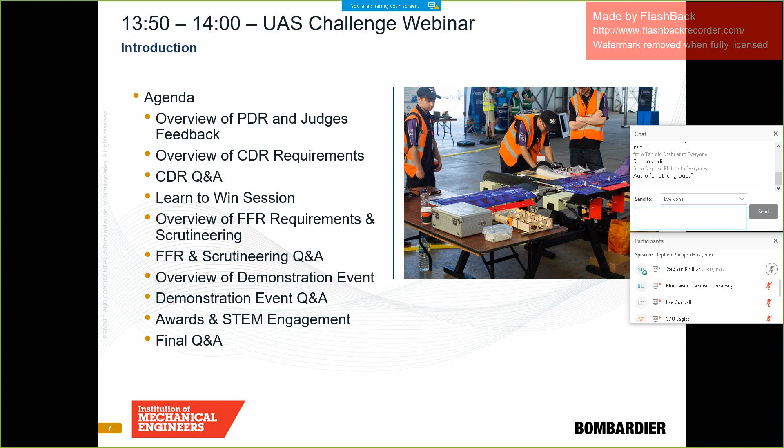Then I think we'll have a quick coffee break and come back to talk about the FRR requirements and the scrutineer requirements for a head scrutineer. Then we'll talk about the overview of the demonstration event, and again have a bit of time for questions and answers. Then we'll end up on the awards and STEM engagement activities of the competition.

Next slide, please. Okay, so for this judging aspect of the competition, I'm going to hand you over to our head judge, Lambert.

Good day, really, because I guess people are in all sorts of time zones listening to this. So, where we've got to in the competition now is you've done the concept paper and we've given you feedback on that, and that was great. You all delivered your concept papers on time, I think. Excellent.

PDR, delivered them. We've been through the judging process. We had our meeting yesterday, the judges and those. I'll only be able to give you some generic feedback today, but I hope to get your individual feedback and comments on your PDR papers within the next week or so. That's the aim. Then going forward, you've got the CDR coming up in the middle of March, and then the FRR of the demonstration event.

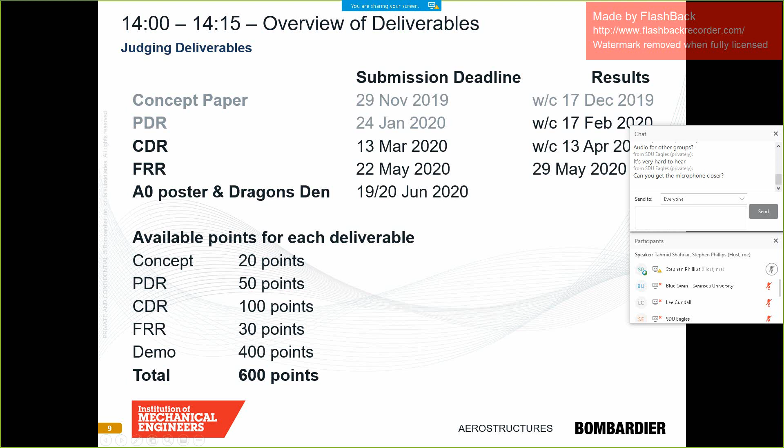Just to remind you a bit about where all this sits in the overall competition: the concept papers were 20 points. We gave you some points this year just to encourage you to actually go and complete a paper. PDRs were 50 points, and then going on, you can see how you come up with that.

Right, so what I'll do is talk a bit about the range of scores that you see, talk a bit about documentation, and then go through the sort of things we were expecting to see in the sections.

Some of you did extremely well, a lot of you did. We're very encouraged by what we've seen with the PDR. Year on year, people are getting better and better at doing this. And then a few pointers about adherence to the rules, just to make sure there's no misunderstanding about the issues on the rules.

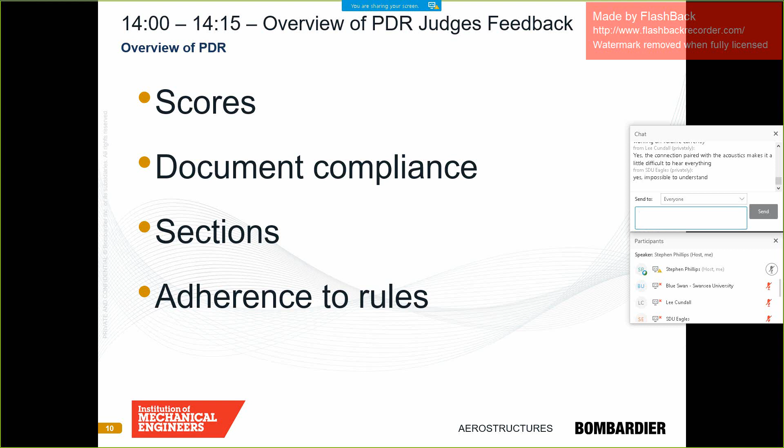Right, so the range of scores we've got this year - remember, this is out of 50 points, and these are preliminary scores. The scores for these documents will remain preliminary until the demonstration event, until we've seen what you've actually delivered, and confirm these scores. But they range from 19 to 46 of the teams, with a median score of 32 this time.

However, it's a bit of a 'but' - 3 teams were slightly late in delivering their PDRs, and as you will have seen clearly in the rules this year, we've introduced penalties for late delivery. Now there are 2 reasons. One is, in the real world, if you're bidding into a contract or a research grant or anything like that, if you're one minute late on the time, chop, you just won't get read at all. And punctuality is absolutely essential in industry for these things.

So we're being very generous in just giving you some points penalties for being late. But the other reason is the team of judges I've got doing this are all senior, busy working engineers in the industry. We don't have long to do it. They're devoting a whole load of their own time to doing this judging, and so it's unfair on them if we can't get the documents to them to see as well. So apologies in one respect, but the three teams will end up losing some points simply because they're late. So do try to please be on time.

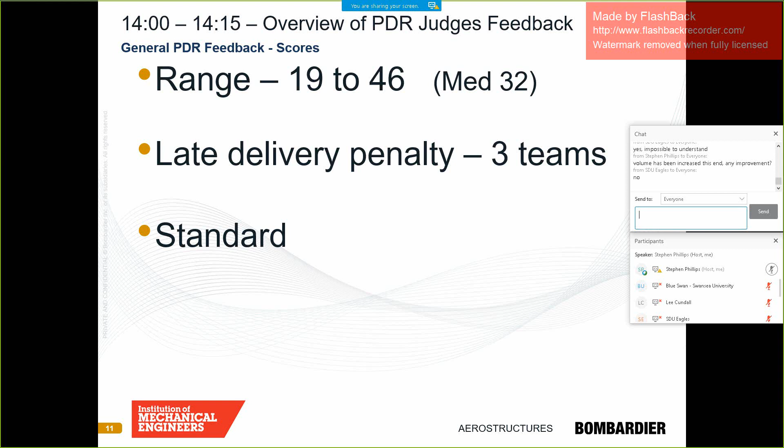But overall, I mean, the standard of the documents was very encouraging this year. Next slide please.

We've lost a bit of this slide, but one thing that's actually a little bit irritating is document compliance. Two-thirds of you, literally 24 of the 36 teams, failed in one respect or another to follow the very standard rules about how we want the document presented.

And it might seem annoying doing this sort of thing, but it's all there for a purpose. On the cover page in particular, we do ask that the compiler and the academic supervisor, or their equivalent, sign off the document. This is a process you'll have to go through in industry, and any document you produce has to be signed off in that way. A lot of you failed to get either or both of those signatures.

We don't want pages we didn't ask for. I know it may be nice putting in context pages, lists of abbreviations and all the rest of it, but unfortunately we've not asked for them, so please don't add pages we don't want. Don't add appendices that we haven't asked for, because they won't get read, they're just an irritation. Do abide by the page count, because it's there for a purpose.

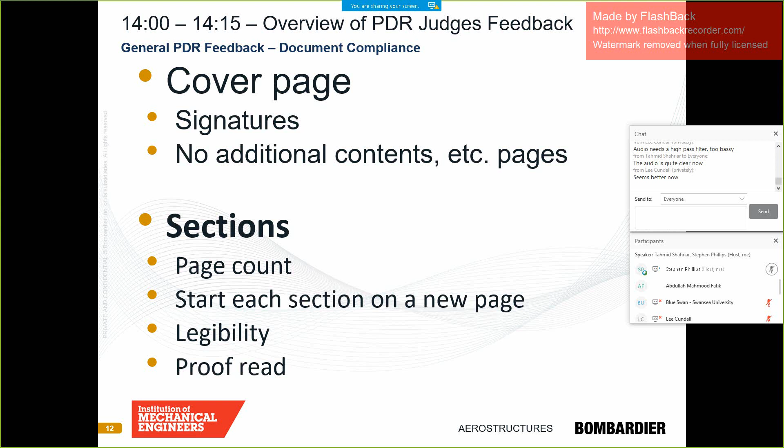What we were hoping to see here on project management is a plan going from the start to the end of the project, not just a little section of it. This is a project plan: where your progress is, how far you've got, maybe your percentage completion of activities, which bits you're ahead on, which bits you're behind on. This is to help you think about how you're doing and where you need to put resource or effort into sorting things out.

Do, as was said this morning, testing. You heard a lot this morning about the process industry does in designing really complex and important things like wings, and how much effort goes into testing. Testing tells you a hell of a lot, so don't leave it to the last minute, because you will learn things.

It is very hard, particularly if you're in teams that don't work closely together, for the integration of this—what somebody's done here and the impact over here isn't obvious until you start testing something. So do give time for testing.

Concentrate on your major risks, and that's why we ask you to do risk assessments. It does help you understand where you need to put resource and effort into. And we ask you to give some mitigations to those risks and do something about them. Don't just write them down as a paper exercise.

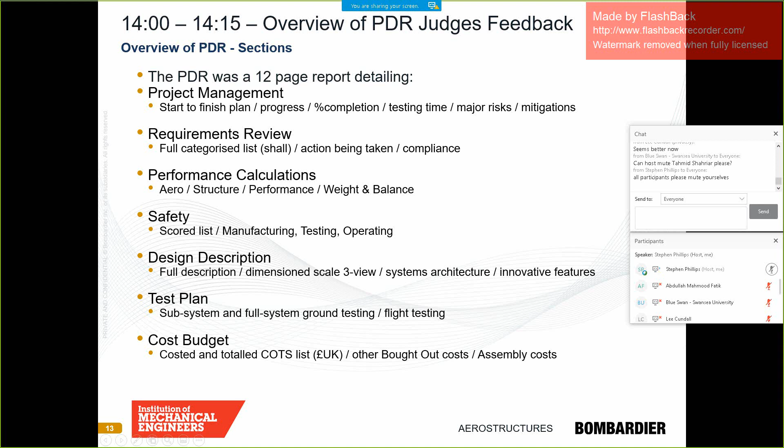And I think it's a lesson learned for our future next year's rules, that we've got to be clearer to you what it is that we're looking for. But bear in mind for the CDR. So just a few quick points on issues that I think came up in the rules.

Most of you seem to have understood the rules properly, but just for the benefit of the doubt: the minimum aid package you must fly is a first aid kit, which weighs approximately 500 grams, and at least one flour bag, the smallest being a 500 gram flour bag. So that's the minimum aid.

It is not just a first aid kit, it has to include a flour bag as well. There is no maximum, other than the fact that you can't have a maximum takeoff mass of more than 6.9 kilograms. So if you can build your thing for a kilogram, you can carry 5 kilograms of aid package if you can. Some of you seem to have read that 3 kilograms is just an illustration in the rules of combination, and the flour bags can be in any combination you like, in 500 gram and 1 kilogram ones.

By the CDR, we would be quite interested in knowing what it is you're planning to carry. Nothing else - Christina's got to go out and buy the flour bags, and we don't want to be either short or have too many to dispose of later. There's only so many cakes you can bake afterwards.

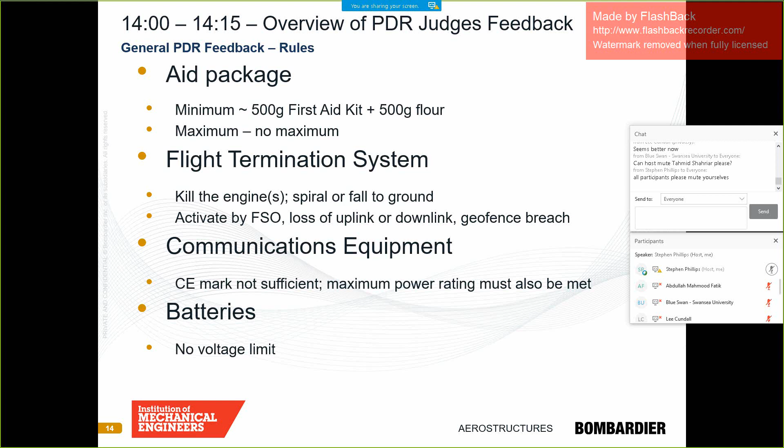What you can do is carry more than one power logger, to split the load, if your continuous current rating or peak current rating is going to be above the limit of the power logger. Or you can opt not to do an efficiency measurement if you prefer - you don't have to do it, but if you don't carry the power logger, we will deduct its mass, albeit only 20 grams or so, from your allowable maximum takeoff mass. We'll ask questions later if that's clear.

Michael, over... yeah. Right, oh no, I'm doing it on my computer again.

Right, so now on to the CDR. We can do some questions at the end, come back on anything from the PDR, but that's history now - you can't change what you've written.

The CDR, as you'll have heard this morning, is the process that industry follows in designing and developing an aircraft. You get to a point of doing critical design review that says now the design is frozen, ready, I can go and build it.

We fully appreciate that the timing when we're asking you to deliver these reports is probably way out of kilter with what you're actually doing. Most of you, by March, when we're looking at these, are well past that stage. What we're looking for is a report of what you did at your CDRs. The timing, as I said, is not great.

What we're looking for on the CDR is a series of sections, so please bear with us. The cover page doesn't count in the page count, and please do it the way it is, because when we've got 36 of these things to look at, having that information on the cover helps us remember what so-and-so said. Particularly the picture of the aircraft is extremely useful to remind you which one you're looking at.

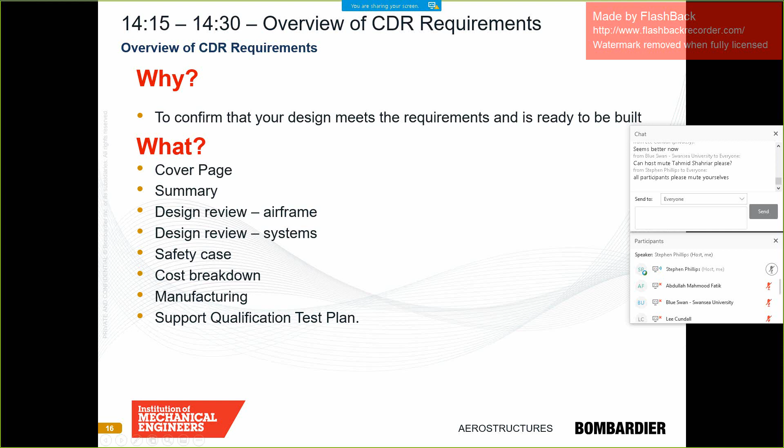Then we go on to the meaty pages on the various things. On the summary page, what's important is changes from your PDR - significant design changes from your PDR. You'll continue this, and it becomes really important too when you submit your FRR that it's any changes from your CDR, because we do need to be able to see that.

So the ones that are collecting points, the design review, is quite a long section - 4 pages, plus a page which is a detailed dimension drawing, please. We split it into airframe and systems - this is no industry standard split, it's just so that they get about the right sort of size. In the airframe bit you've got aerodynamic structures and the propulsion system, just to balance it out.

The assumptions you made in arriving at that, and any calculations to support it - we want to make sure you've again thought back about the requirements, confirming that you're addressing all the requirements of the competition. If for any reason you're deviating from that, and there may possibly be some reasons, you must explain in detail why you think you're justified in doing it. We will tell you afterwards if we don't think you're justified in doing it, but you do that.

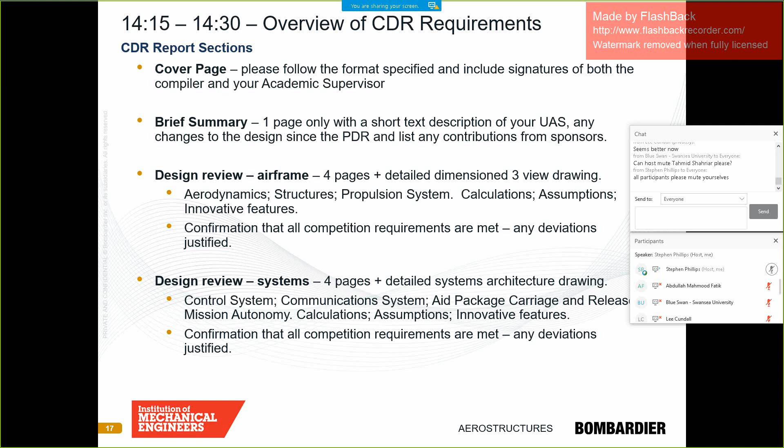The systems are the other bits - basically the control system, the communication system, and the aid package carriage and release, and how you're going to implement your autonomous features. Again, the same stuff, but please, again, a page of a systems architecture drawing as detailed as possible.

So then we go on to the safety case. As we've banged on over the years, safety and aerospace are very twinned items. We're looking for 2 pages on your approach to safety - this is just taking it on further in more detail from the PDR.

And we want to see this table of hazards really scored. So we give you an example - this little colored diagram, which is used not only in the aerospace industries but in many industries, so that helps you to concentrate on the things that are really important.

You want to get to a post-mitigation state where you have reasonable control of this, or if there is something that's still a significant risk, again explain why it is and how it is you're going to try and limit its impact. But remember, it's not just about the flight operation side - that's clearly important, but it's all aspects of risk.

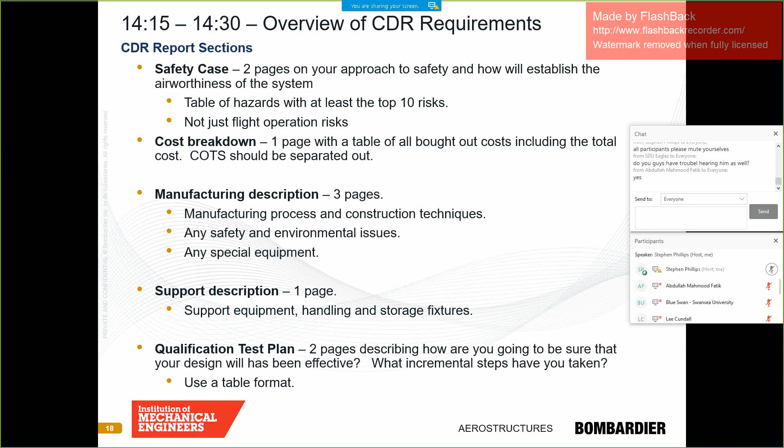So if we go on to the next thing, a summary of issues around the CDR. Remember, this is worth quite a lot of points - 100 of the 600 total points. So it's worth putting some effort into this because it could well influence the overall champion competition.

Do take note of the feedback that we give you from the PDR. To some extent it might be as well to acknowledge if we have made some points, even if you don't, for whatever reason, implement them. Maybe acknowledge and explain why - maybe you even disagree with us, or couldn't do what we suggest. It's probably worth doing that. But hopefully, if we do make a suggestion you think is a good one, you actually take it on board.

But you absolutely must address any corrective actions given. Corrective actions are things that will end up with either an unsafe or a non-compliant vehicle at the end, which would ultimately prevent you from flying on the day. You must, if you've got any of those, refer to them in your CDR and specifically how you have affected the correction - we will be checking.

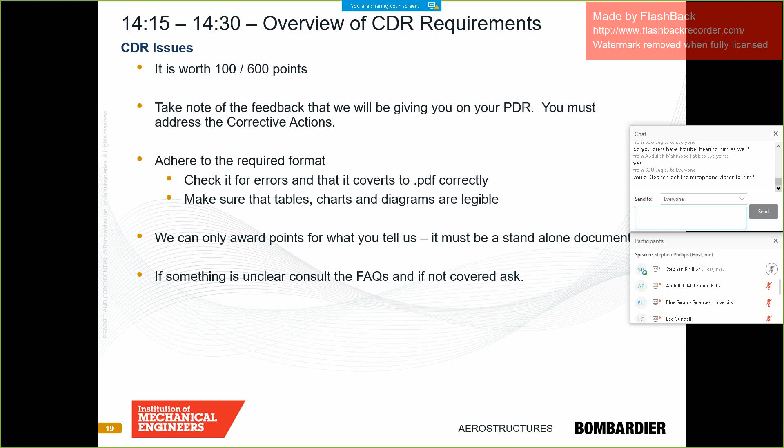But yes, do ask. Don't just make an assumption that might turn out to be incorrect in the end. And then finally, I just got... oh yes, different to my picture, a few sort of think-abouts.

Now this is just a totally random list, but it's a really good opportunity to look back at these requirements and make sure we go through rigorously. That's why we asked you originally in the concept stage, and certainly in the PDR, to have a structured list of requirements, so that you can keep going back and checking: yes, I've done that, no, I haven't forgotten that, yes, the flight termination system will do what it's asked to do.

As I said, make sure about this communication regulation side - just double check that you're going to be compliant with that. Double check about the flight termination system. This will be tested on the ground before you allow it to fly, so if it doesn't do what we asked it to do, you're going nowhere, because that's not safe.

Think about aid package carriage and release. That's part of the core program, therefore it is important that it does release, that it does work, because in past competitions we've had a lot of quite decent flying, but a lot of teams have had problems with their aid package release.

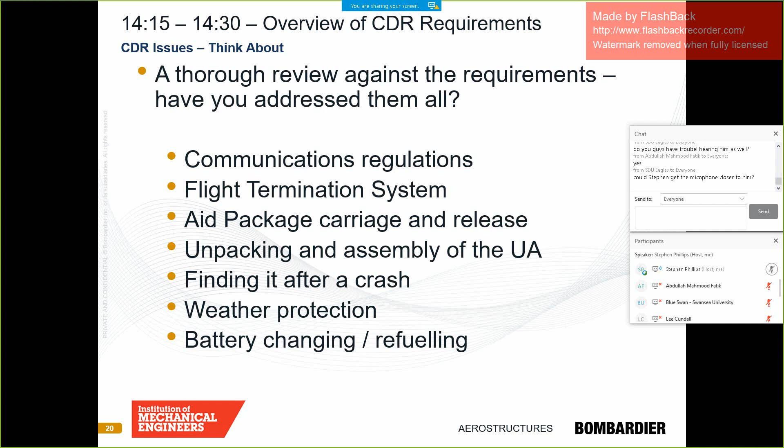And the other thing is being able to quickly change your batteries or anything else in the aircraft. Just think about its supportability in that respect, or if you're going to refuel it, because some of you are doing a circuit, collecting some more aid package, going around again, or between the two, the core mission and the optional mission. So just think about how easy and straightforward it is to do that.

Oh yes, what struck me at the presentation this morning, talking about co-located teams and things like that, is - particularly for the Open University - they're not very co-located at all. But even for the rest of you, no doubt wandering around, I suspect you don't do all of this all sat in the same room at the same time.

Do think about the way your configuration control of your vehicle works, because somebody having a bright idea and saying 'oh, I'll do that' might not realise the implications and the consequence on other team members. So this communication between team members is really, really important.

And again, one of the reasons why you test these things - with the best will in the world, you will have done something, someone else will have done something else, and you haven't realised the interaction between them. So when you come to test it, you find the wing falls off or something, because someone has changed that bolt or whatever for what seemed like a good reason. So you remember that. Right.

So on to Q&A. Well, yeah, very good question that really. And I guess looking forward to the following year, we're thinking about the process and trying to make it slightly more sensible in the timing of the academic year.

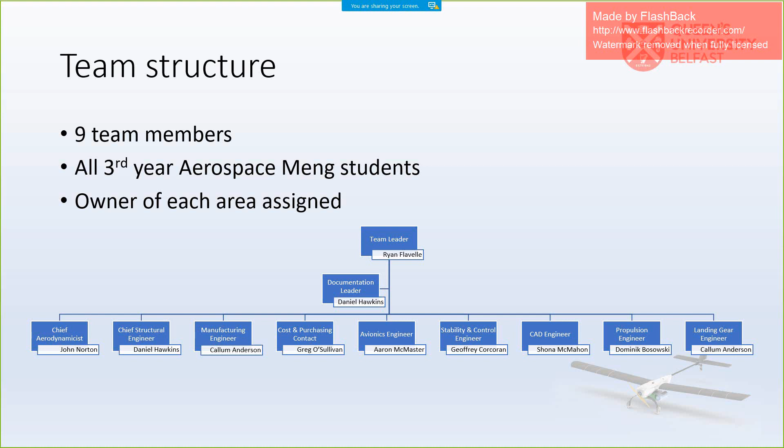So the way we worked our team was leader Ryan, and everyone else took on a responsibility. For example, I had avionics, other people had structures, manufacturing, stability, things like that. But that didn't mean I went away for 6 months and then we just shoved it all together. It meant that I was in charge, so if I made a decision, that's what we went with. But every week we had a team meeting to make sure everyone was actually doing what they said they were doing, and that it was looking right. So we made sure to work as a team and everyone helped each other out so that someone off for a week, we didn't lose time.

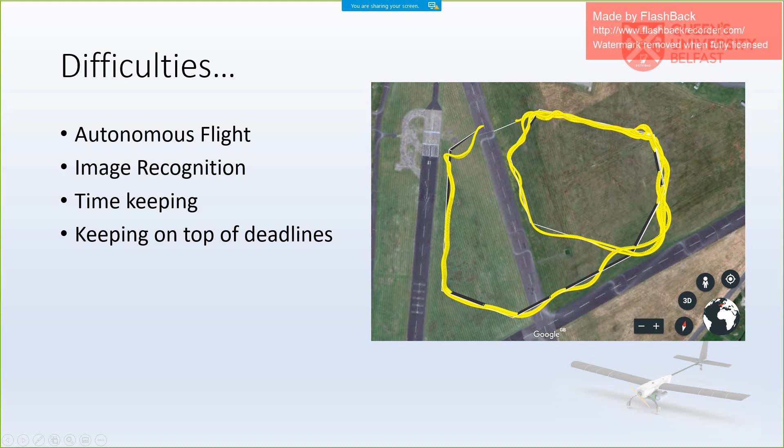Just some top tips, the way sort of stuff, and I think we do it quite well. Keep the design simple - there's so much stuff that you need to drop payload, right? You need to make sure you have an aircraft that works in isolation by itself, because you can't get an aircraft working with those extra capabilities. Be proactive and work - don't leave your CDR the week before. Make sure you start early, start chipping away at work. Like Aaron said, fly early, fly often.

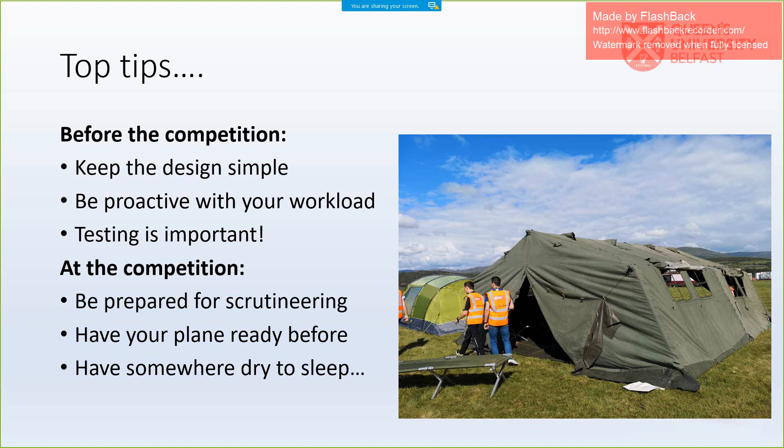Just to summarize the overall experience, it's the soft skills and the hard skills. Obviously you build on your engineering skills, you build on your teamwork, you build on your ability to make decisions as a team, take responsibility for making decisions - that sort of stuff we didn't really get before this module or this experience. Also, it's great fun to get out there, great fun building this thing and seeing that reward from it. So I think what we found is we want to make an experience - so buy in.

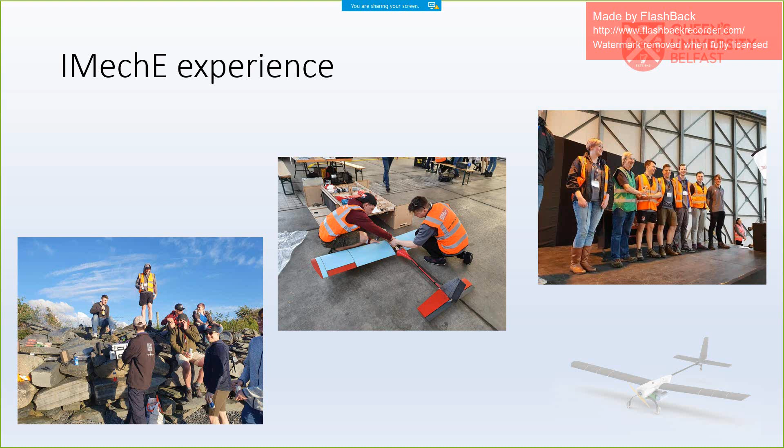No, go on - as chief scrutineer, how did you find scrutineering? What did you find was the challenge?

Interesting - it's something I've pushed for a few years, but that was the tipping point to say, why don't we get it done? If you go back 3, 4, 5 years, people were taking these out, diagonally fitted into vans. So that was a key bit - people were arriving, but actually this thing's got to operate, and you need to have it protected and looked after, so you can do that.

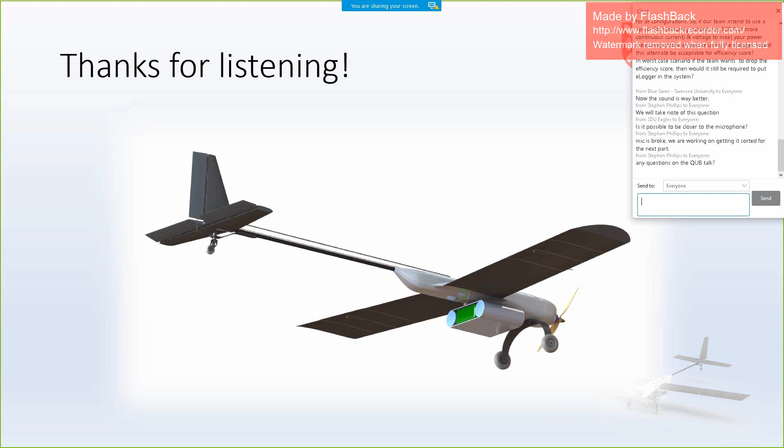Just to give everybody online an overview, the next part of the presentation is about the flight readiness review and scrutineering. This presentation will be taken by Rod Williams, who's the chief scrutineer for the challenge. Welcome, good to see so many of you here. Rod Williams, President of Bristol - I'm going to have to project my voice, so I'll let you know I'm ex-army.

Yes, welcome - this is about the FRR and scrutineering. This is about where you're turning your theoretical design into a practical, safe, airworthy flying system - that's what we want to see. Obviously it's the key couple of phases post-CDR, pre-actually operationally flying this on the event itself. Two key stages: flight readiness review, which is a continuation stage, if you like, from your PDR CDR process, bringing all that information to the point at which you're ready to do the flight, and before the second element of it, the pre-flight scrutineering.

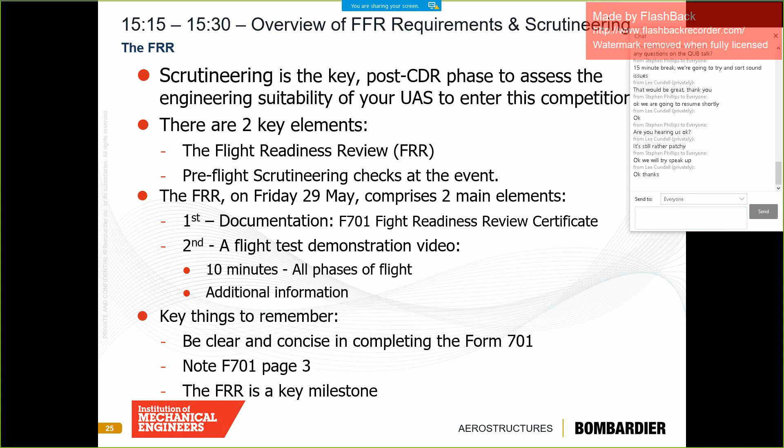As I mentioned, page 3 has some top tips. So what happens when you get to Llanbedr? You've arrived, checked in, got into your pit lane, sorted out, shaken out, ready, and the call comes for you to come through.

What we do now is quite well in advance. We used to do it just pre-flight and try to get you through it, but to keep the flow going, we now try to do that on the arrival day and as early as we can pre-flight. It should be probably about a 20-minute process.

Some teams have been phenomenally slick. The functional start, stop checks with flight termination system demonstration record is 38 seconds. Now that isn't setting up the aircraft and going through the checks. Other people, it takes a lot of tackling, messing around, tweaking, going back and coming back.

We need it to be as quick as we can. We need you to be as professional as you can in those jobs. Having checklists is ideal, and needing you to be organised. That's again why we want this to arrive in a transportation case, so it's protected and delivered.

We were in the environment of the humanitarian mission that you're going on. We may have had to fly that out freight, transport it by road, some distance, whatever. You need it protected, so we have them reach these things out of the van and get them through the doors into the room that we've done scrutineering in. They've clipped wings and all sorts of things.

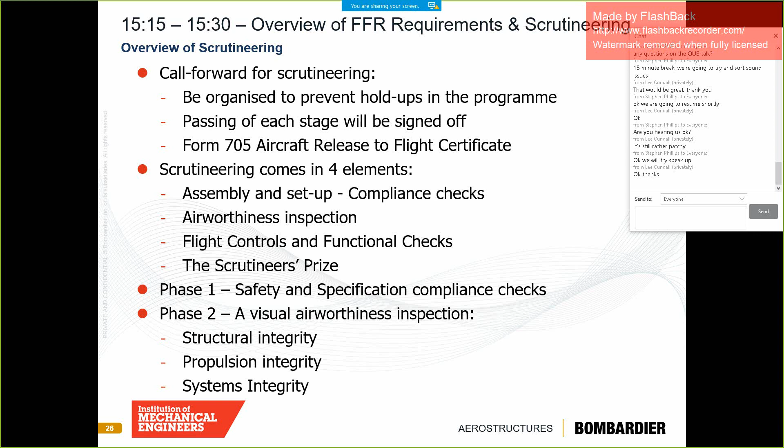So we click on one. The first thing about that is structural integrity. It was mentioned earlier that you have two points of security, so if one fails, you've got a secondary system in there. It's not necessarily got two bolts to hold it on, but that each bolt has two means of security.

Some examples up there - you've got a lock nut. There's a rundown torque strength in the nylon in that. They are reusable, but only so often. That's only one means of safety - okay, as is a lock washer holding a nut. One means of safety.

Lock wire comes in as a secondary means of safety. You have locked the bolt, and then you wire lock it. So as you can see with the lock washer, tightening it down, you've only got one form.

You can add over it Araldite - you can lock off with Araldite. There's a thing called torque seal. It's very good - you put a torque stripe on it and you can see when that cracks.

We'll count that as a secondary, but critically, the best way with nuts and bolts is to have two nuts. You lock one nut onto the other. And critically within that, it can be in safety.

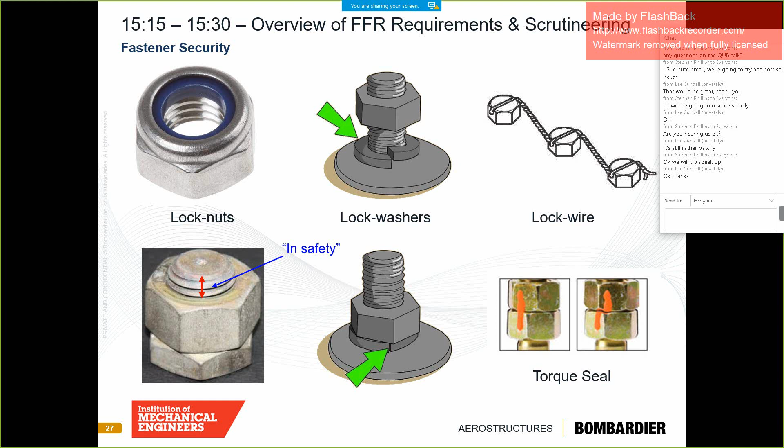In there, we've talked mechanical, structural integrity piece - that your undercarriage is strong enough to absorb a heavy landing. Maybe not fully - you may be Citroen 2CV crash worthy, that bits will fall off when you land - but fundamentally we want this to be able to take what you would expect normal landings to be.

That control runs are straight, secure when they're fitted. We don't want buckling push rods to go through. They should be nice linear runs.

For systems integrity, there's all sorts of odds and ends, but those who've got any knowledge of the Navy look at a bunch of wires that's thrown in and call it a snake's wedding - which you'll hear from a particular scrutineer that works for us, Freddie, who's in the Navy. That's your wires all over the place. Your wires should be tidily routed and secured, so they're not going to interfere with the controller - not going to drop through and trap something else, interfere with your delivery system. They're quite key.

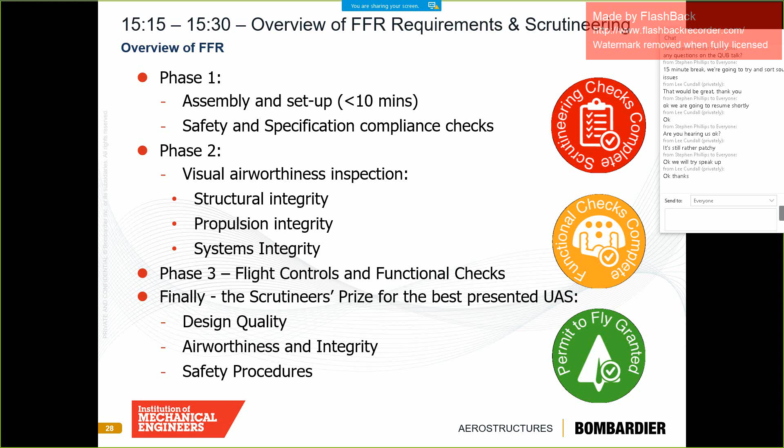They're looking for things that stand out. Say, Freddie the Navy guy - he's actually pretty hot on the wiring stuff.

Make sure your FRR video is good, especially if you've got someone who can get them on doing it. Putting together a good video that shows us not just all those stages of flight, but actually how you developed it, how you got there, the flight test regime you've done, even your static test regime.

We were talking to someone earlier - you saw the flex of that wing. There's a good bit of video from last year or the year before of people hanging weights off the wings of the aircraft. They haven't turned the aircraft upside down to show the actual flex that would happen, but they've done something to demonstrate it.

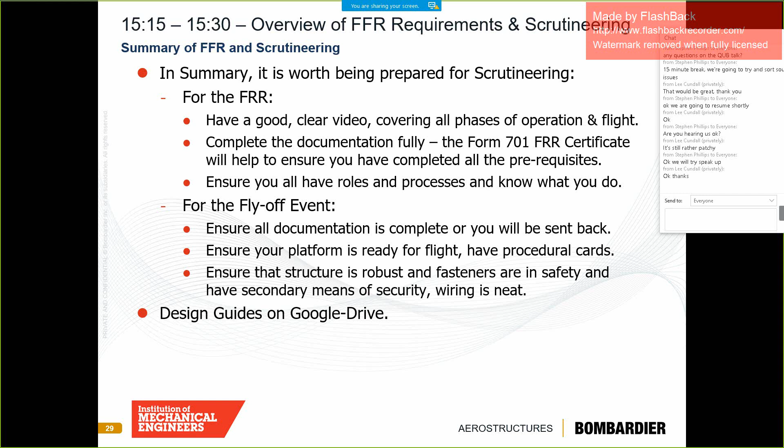There are points to be gained for the prize - how well, how fine, the quality of finish you've got in the product. Good luck with the challenge. Things have improved remarkably over the last 5 years, so we keep that momentum rolling. The experience you gain from other teams, maybe from the briefing here, builds on that. But as I say, what we want to see is something good from you that makes our job much more enthusiastic - good stuff, because we will query down a bit, asking what is the construct of your work. Good luck with them.

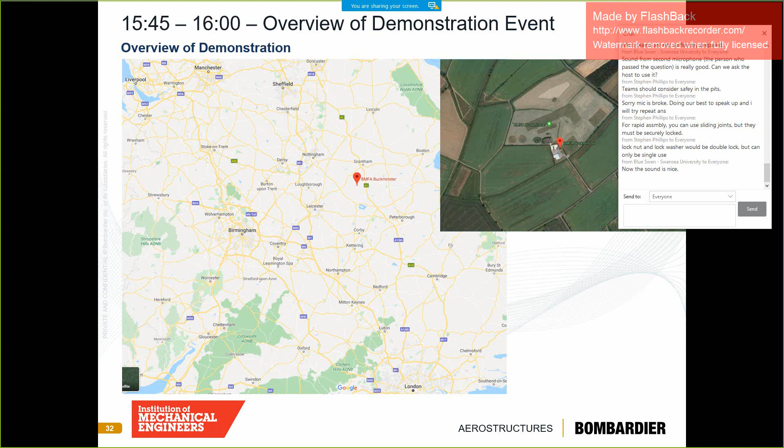So, hello, I'm going to try and give a bit more detail. Is it possible to zoom in on that map by any chance? On the map in the top right-hand corner, just so that...

So I've got a few points to run through. First of all, I'll go through changes to the 2020 competition for those of you who have been involved and competed before, and then a few reinforcements of what we're still doing the same from last year. So as you can see, we're operating from a very different site this year, from BMFA Buckminster compared to Llanbedr last year.

The site is significantly smaller. However, it is catered to operating small UAS, such as we run in the competition. They do quite a lot of other competitions there, such as the BMFA Heavy Lift Challenge, and they have operating clearances there for operating small UAS within CAP 722 and also outside of CAP 722 norms. Obviously, we will operate as per the UAS Challenge rules for 2020.

So the site, as you enter from the road here to the south, you'll arrive at the car park. The building in white here that I'm circling with the cursor is the hangar, where you'll be set up in the pit lanes for your maintenance activities and for preparing your aircraft for scrutineering.

On the left of that building, there are a couple of rooms which will be used for the scrutineering and for the hazardous maintenance area. So any composite repairs or any sort of composite curing that you need to do, please make sure you do it in there, away from all of the other competitors, so that you're not giving anybody any horrible carcinogenics.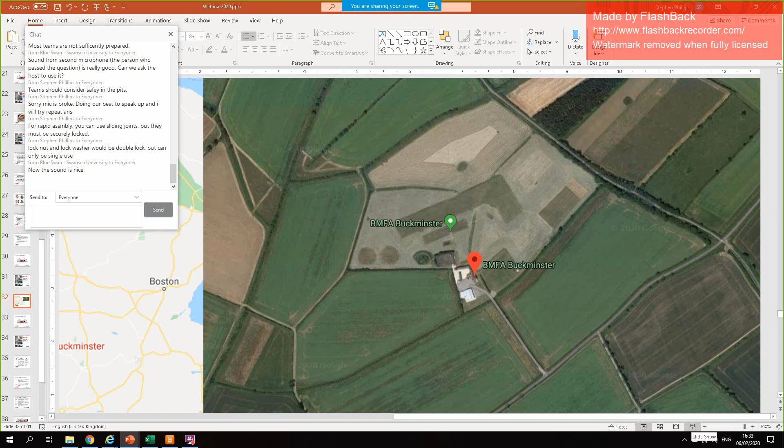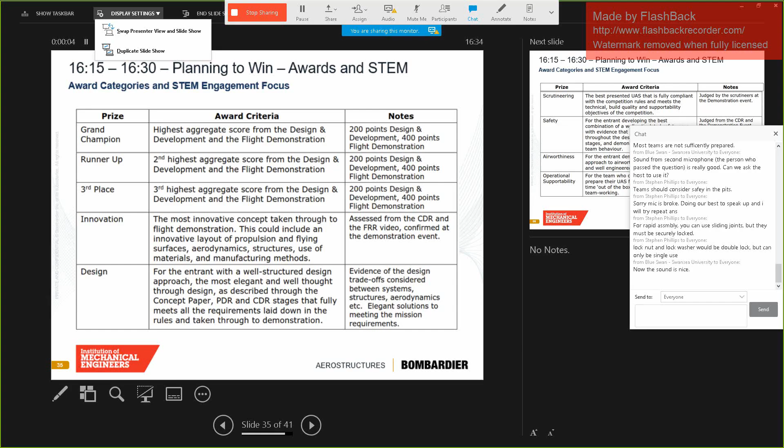So, prizes and awards. There are 13 awards available, so it's not bad odds here with awards - decent chance of getting an award.

The principal awards are grand champion, runner-up, and third place, made up of 200 points on the paperwork stages you'll have gone through, and then 400 points on the flight demonstration event. So that's a simple first, second, and third place.

But note what Alex said - we're giving you multiple opportunities for flying, but you need to be savvy about this, because you might do a cracking first flight, and if you do a second flight you might actually reduce your score if you don't score as much, because it becomes an average. So you have to do a bit of game playing, and be confident you're going to keep raising your number rather than lowering it.

But the other awards - you've got an innovation award, which is based on what we read and see of your UAS. Design award, again based on what we'll read about and what we see later. Carry on, please.

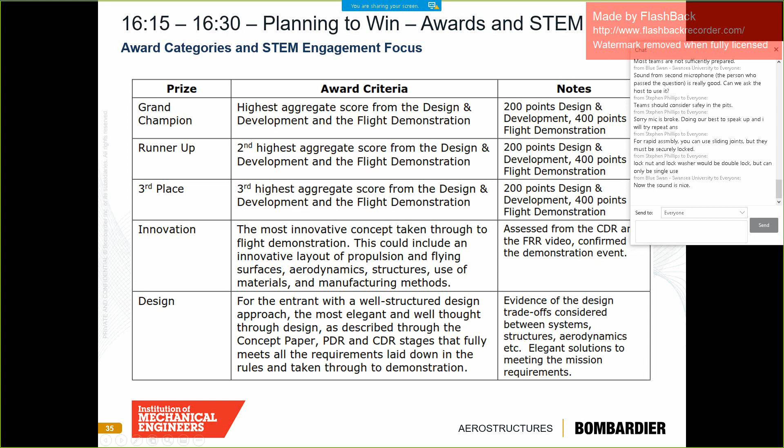Then there's the scrutineering award that Rod has mentioned. A safety award, again picking up on what Rod has said, safety is really important, and so this will be looking at what's been written and what we will see at the demonstration event, covering all aspects of safety, including the pit lane, everywhere that you are, on the flight line, in the pit lane, etc. So it's just this total approach to safety.

An airworthiness award, which again comes through what the scrutineers see at the demonstration event, and what's called an operational supportability one, and this is about this out-of-the-box type thing that we've introduced this year. So that's a further award.

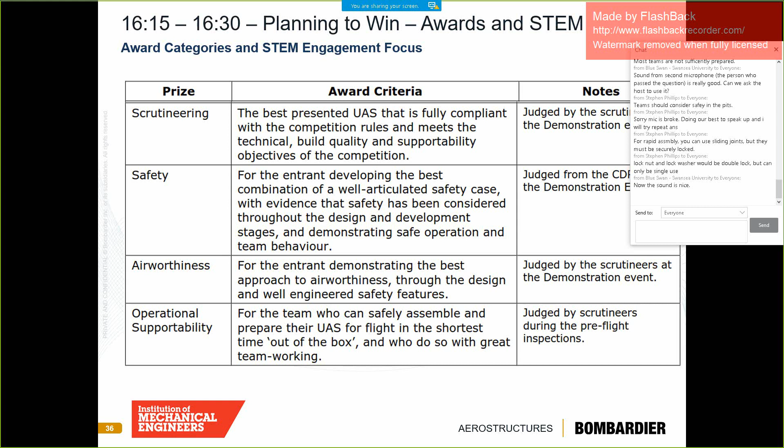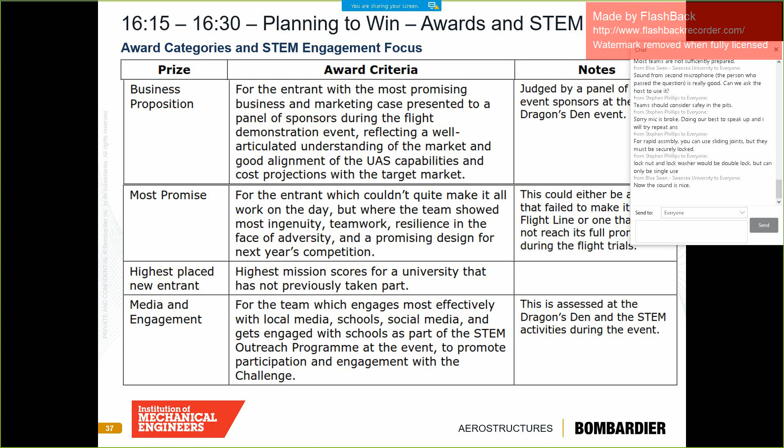Okay, so I think the last bit was just on STEM. I think just mentioned. Yeah. And so that's about it.

So if anybody wants to ask a few questions on the overall competition, whether it's from the judges, the scrutineers, or for safety or the project manager about the event, please do so now, including those online, and we'll try and answer them as best we can.

So if it's not possible to tie your pilot down to those 4 days in June, it would be possible to have a pilot allocated when we get there, with the correct certification. So all of the operations, because as with last year, we mandated that it will just be the safety pilot that the IMechE provides. So there's no requirement for a certified pilot with you. You have to have the insurance for the pilot liability from the BMFA. So it's to do with the new CAA regulations.

What's the pilot in command? What's the UA operator? And the terminology for those. So we will put this formally in the supplementary rules to be released, but the teams will provide the UA operator, not the pilot who commands the flight coordination system. They are just responsible for the safety of the operation, i.e. planning the correct waypoints within the line of sight that then be done.

You want a quick definition? Operator: person, organisation, or enterprise engaged in operating, or engaged in aircraft operation. That's the team, yeah.

The pilot is the person in direct control of the UA, so remote pilot. Remote pilot, a natural person responsible for safely conducting the flight of an unmanned aircraft, operating its flight controls either manually or, when the unmanned aircraft flies automatically, by monitoring its course and remaining able to intervene and change the course at any time.

So that's the safety pilot that we provide. We would have that individual in the supervisory role.

We look at the BMFA certification. We have the basic BMFA covered. As an operator, that's fine. It's only the BMFA, it's only the IMechE safety pilot that we provide, that requires the BMFA certification A or B.